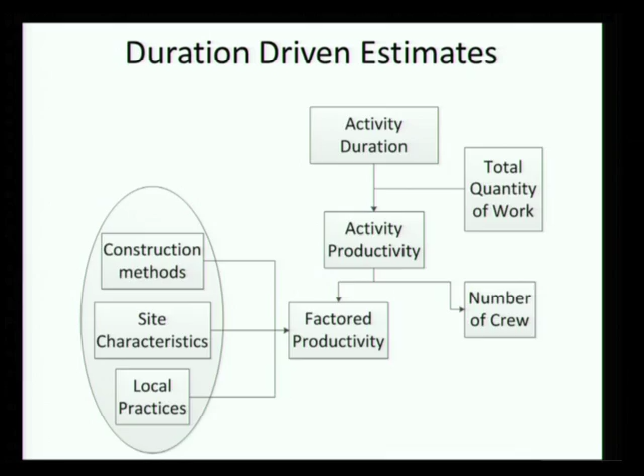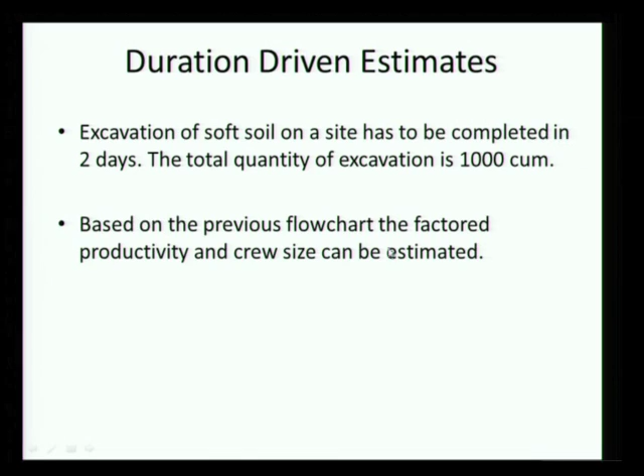So if we go with duration driven, let's take an example here. Excavation of soft soil on a site has to be completed in 2 days. Now we are fixing the duration. Total quantity of excavation is given. Based on what we discussed previously, we are going to try to factor crew size. Let's take this flow chart here.

So this shows you the example. So we have 2 days, which is the duration of the project. 1000 cubic meters is the quantity, the total quantity of work. Now, okay, so if I have to do 1000 in 2 days, each day I have to do 500 cubic meters, taking an 8-hour day. Okay, so that is so much per hour. So this gives me, if I am bringing it down to an hourly basis.

Now I come in from this side. If I have 2 options, I am looking at using an excavator or using manual labor. If I am using an excavator, this is the cubic meter per hour I can get, which means in order to achieve my required cubic meter per hour, I need 2 crew. Whereas if it is manual, this is the cubic meter per hour I can get, and this is the number of crew I will need to meet the requirement. Okay, it is pretty straightforward analysis.

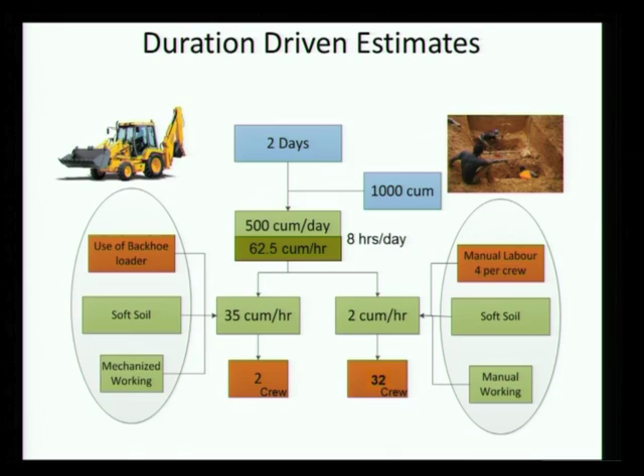I can go the other way around, which we are saying is resource driven. That is, my methods, all of this is fixed, only my duration should change. I mean I cannot mobilize more crew. This is what I have, and a lot of companies face this issue. They actually say, this is what I can mobilize, how long will it take me to do the job or to do the activity.

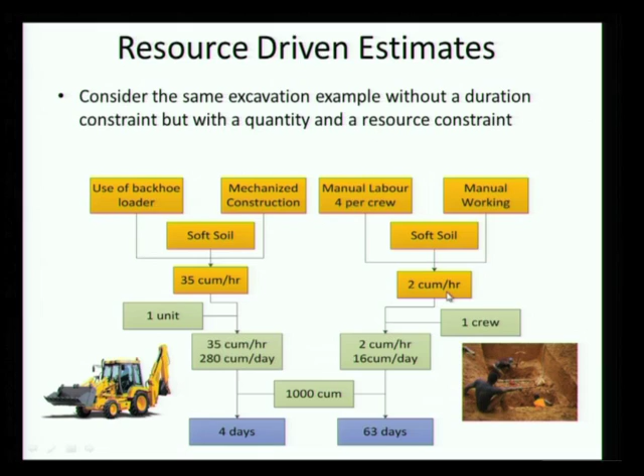So if we go in this direction with the same example, you have a backhoe loader, and it's the same example in the reverse direction, where you have 1 unit at 35 cubic meters per hour, and so with the backhoe loader you say 4 days is the total time with 1 unit. With the manual crew you get 63 days of work. Now what is going to cost you more, time cost trade off, all of this can certainly be discussed, but it's a different issue. Okay, any questions so far?

Now let's take an example which I want you all to solve. It's not very complicated, but let's take it step by step and see how we bring in different factors. So here we have a masonry activity. There are 2 crews of 1 mason plus 1 helper. The total quantity of work to be done is 600 square meters. Productivity is 20 square meter per day per crew. Working time here is 10 hours per day.

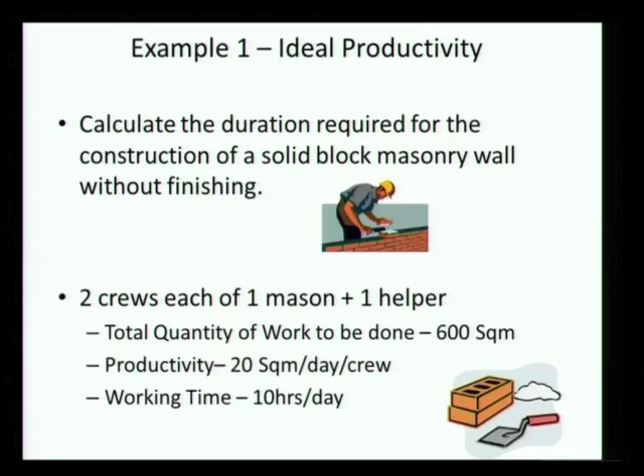How long will you take? 15 days. Okay, so if I am going in from a productivity perspective, I am saying duration is quantity by production. Production is productivity times number of crew. I find my production and I find my duration. Okay, any questions? I am sure there are no questions on this. It's very straightforward.

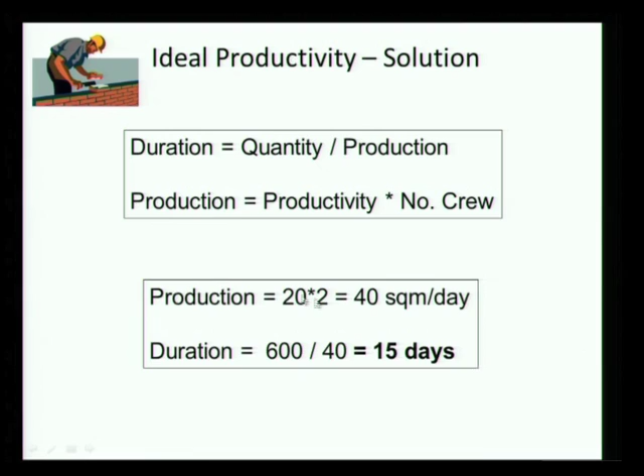Now we bring in these other factors we talked about. The challenge here is certainly not the calculations, but productivity. Now how do I actually calculate production? How do I come up with this number, which really represents what's happening on my site? So when we extend this example, this becomes a little clearer. So here we have this.

Now the same crew is going to work at a height of 8 to 15 meters on a scaffold. Before they were working on the ground, they could walk around. There was no problem. No safety harnesses. Nothing was required. Now they're going to work on a scaffold, as you can see here. And what do you think are the factors now that influence productivity here? Working on a scaffold. So why will their productivity be more or less?

Less. Why? Working area is less. They have to be more cautious. Yeah, they have to be more cautious. They can't move around as freely as before. And getting the materials up is a little more effort. That has to be done.

If the mason has to walk to get some other tool or material, he has to climb down. There's more time required to climb down and climb back up and all of this. So this is pretty common when you actually take on multi-story buildings. You find that as the building gets taller and taller, the productivity keeps decreasing. Even a simple thing like, if the workman needs to come down for materials, the travel time itself just increases significantly.

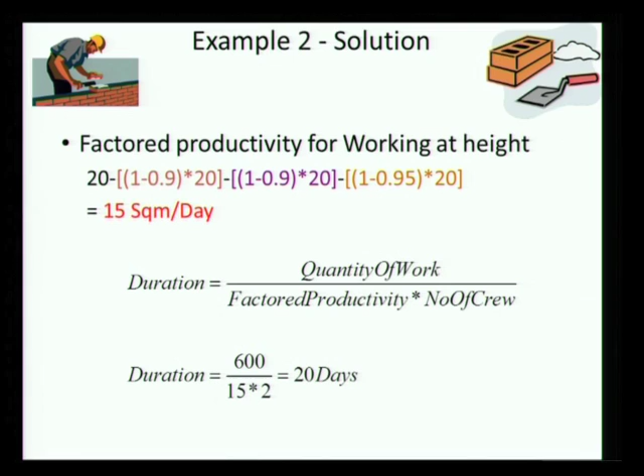So this is one way of factoring, and if you actually go into corporate productivity norms, they will have factors like this, and those are closely held secrets, because when you originally make a bid, if you have these factors right, then you get your bidding and your target price correct. If you don't have these factors right, you can be anywhere over the cost, and you might make a big loss, or you might overbid and not be competitive at all.

So these factors are mainly based on historical and experimental data. Yeah, unfortunately there isn't so much experimental data. So how can we make a factor like this based on experience? It's difficult. Is it based on the importance of the factors which influence the productivity? Yeah, but how do I come up with a number? That's still the critical thing. So let's just take a minute. What would be the most structured scientific way to come up with this number?

So you work on a particular test project, you check for a particular kind of task, given a certain number of crew members, how much productivity is coming, depending on various factors such as the height, the materials, ease of the construction site. All these factors you take into consideration and compare it with the standard test. Right. So first, there will be no test project as such.

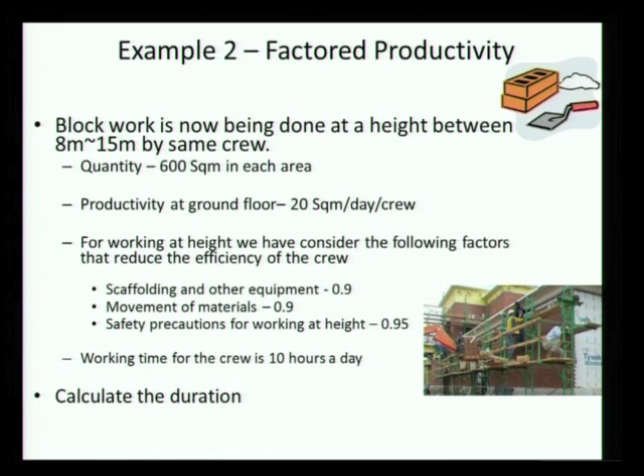Okay, let us take this example further. We talked about working time. We have said a 10-hour work day, but if I am going to take a 10-hour work day, what is the effective working time? Somebody had mentioned earlier that I am not going to get a full day's work, the person is not going to be constantly working. You can see there are breaks in the work time, at least in many of our sites we have a tea break, lunch break, another tea break, and we will get probably 8.5 hours of effective working time.

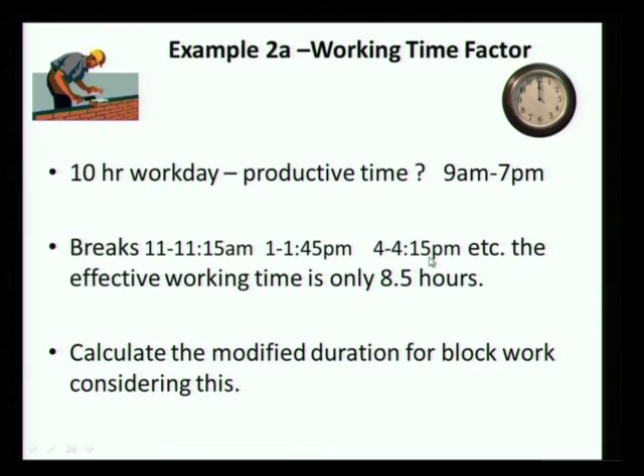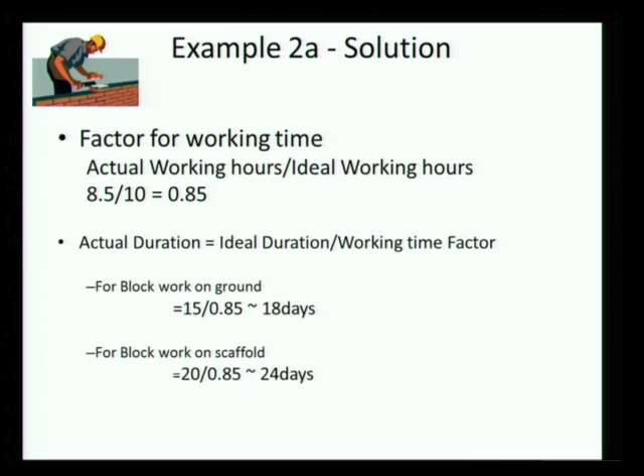And here we again have to modify this for the overall productivity and say, okay, what should have taken 15 days now takes 18 days, what takes 20 days takes 24 days. So even if we take the 8.5 hours of work, do you think people are actually working for 8.5 full hours? No. So again, how do we factor this?

So it gets tricky, and we will find that we come in with a certain productivity estimate, but we are simply not able to hold the production to that estimate, which means ultimately something in our estimating is not accurate, and we have to take those factors and control them to be able to reach the durations we are estimating. Any questions on this? Okay.